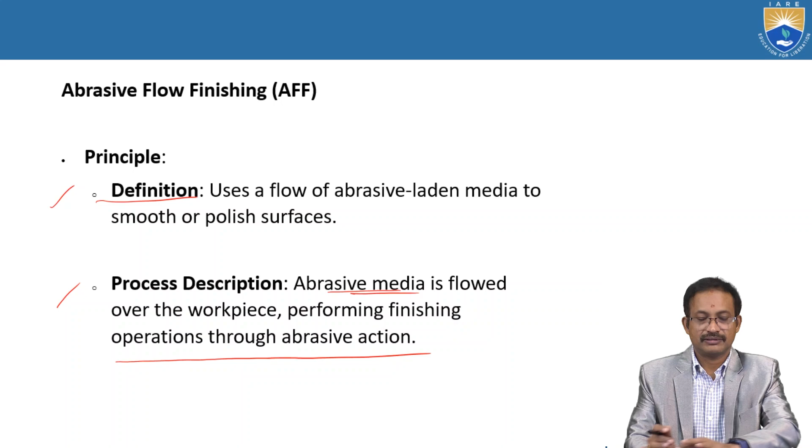At a glance, let us look at the entire presentation. Now, process variables: flow rate, abrasive media. In the machining process, each and every process parameter is very much important. We have to regulate each and every parameter, so then only we will get the expected quality and accuracy. So here flow rate and abrasive media are the process variables.

Flow rate: speed at which abrasive media flows over the workpiece. So we cannot expect the material removal rate with unknown or unpredicted abrasive media flow. We have to control the flow rate as per our requirement. Flow rate is the speed at which abrasive media flows over the workpiece.

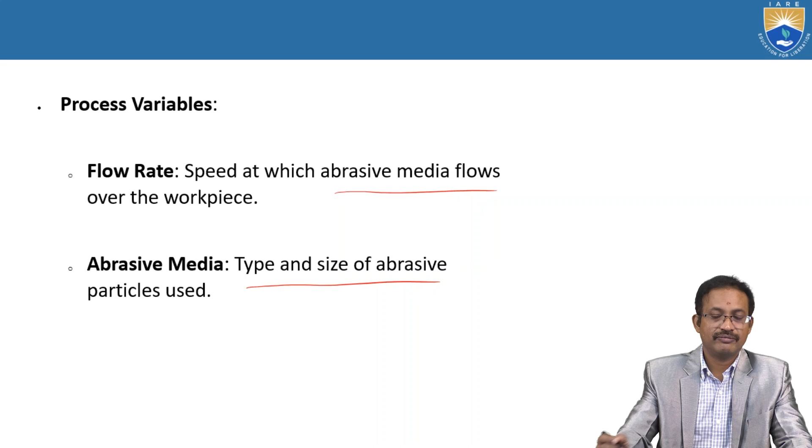Next, second one, abrasive media: type and size of abrasive particles used. What type of abrasive particles are we using? There are so many abrasive particles like Al2O3, SiO2, SiC, like that. So we have to choose appropriate abrasive particles as per our requirement.

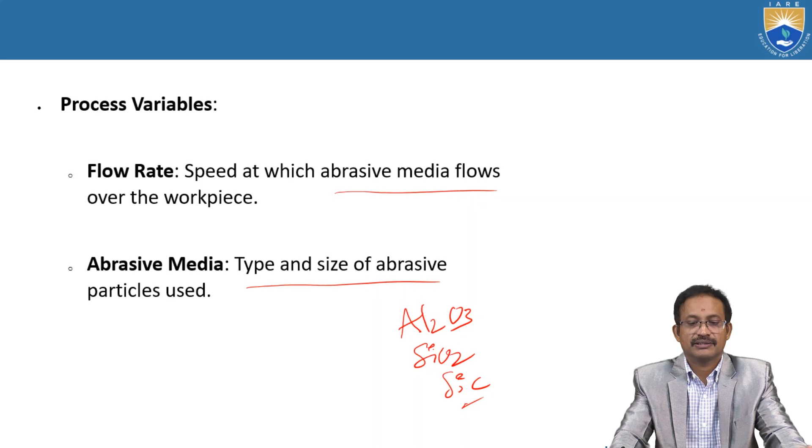Applications: suitable for polishing and deburring complex geometries and internal passages. Polishing means to get a mirror finish surface. Deburring: while we are machining, some debris may remain on the workpiece, or some particles tend to come out but do not come out completely. Removing those is deburring. So it is suitable for polishing and deburring complex geometries and internal passages.

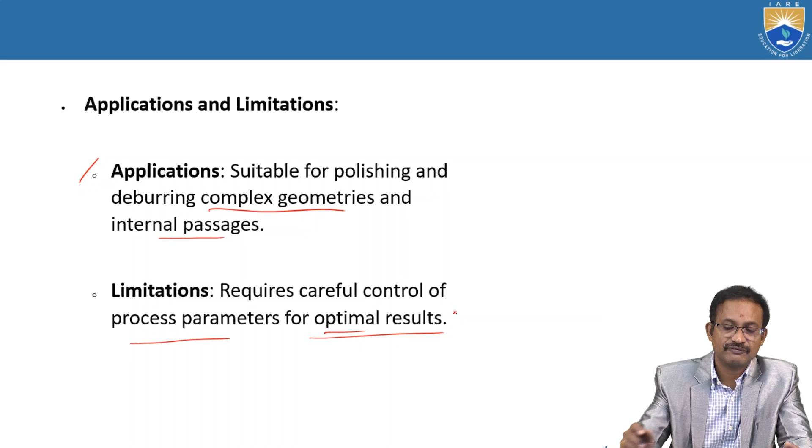Limitations: requires careful control of process parameters for optimal results. Optimization is also important, and at the same time we have to get optimal results. For that, some machining processes may not be suitable. That is a limitation of the manufacturing scenario. So it requires careful control of process parameters for optimal results.

Key terminologies: abrasive media, flow rate. Abrasive media: particles suspended in a liquid or gel used for finishing. Flow rate: speed at which the media flows over the workpiece surface. So what does it mean? Flow rate is the speed at which the media flows over the workpiece surface.

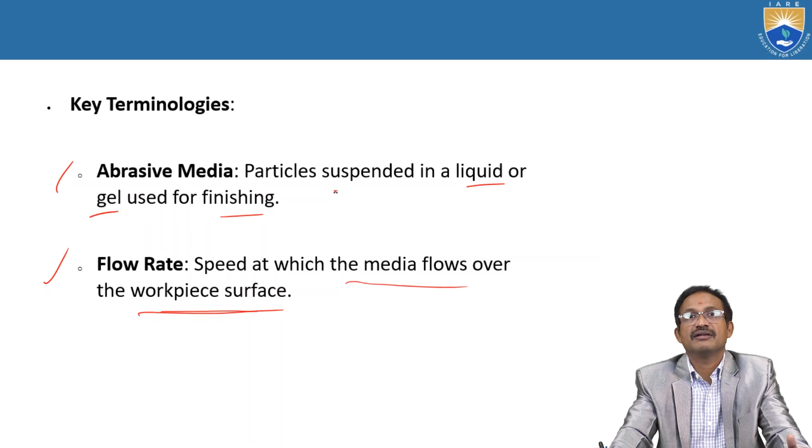Let us discuss abrasive media once: particles suspended in a liquid or gel used for finishing. So these abrasive particles will be suspended in liquid or gel, used for finishing.

Electro stream drilling principle. Here definition and process description are the two items to discuss. Uses an electric field to direct an abrasive slurry for drilling holes in materials. So in order to make holes through drilling, an electric field is set up with an abrasive slurry. The system is electrical, electro stream drilling, and this electric field directs the abrasive slurry for drilling holes in material.

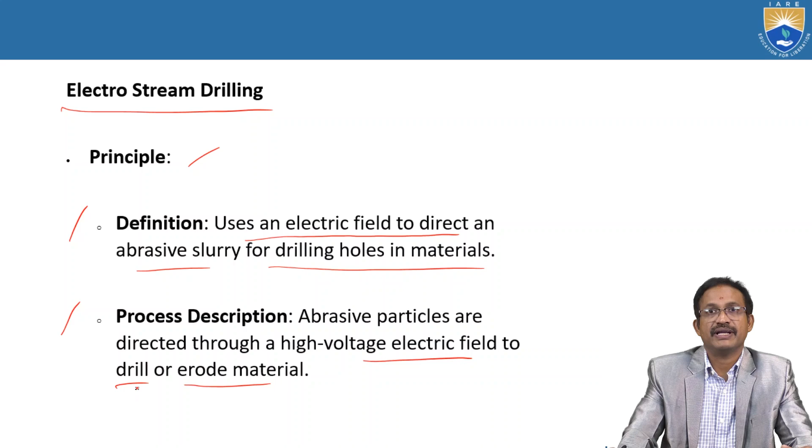Process description: abrasive particles are directed through a high voltage electric field to drill or erode material. Process description: abrasive particles are directed through a high voltage electric field to drill or erode material.

Applications and limitations. Used for drilling precise holes in hard or brittle materials. Let us discuss applications: used for drilling precise holes in hard or brittle materials. Now let us assume a shipbuilding structure. Let us say we need some small holes.

Okay, small holes, and assume that the material is very hard and brittle, where we have to use the technique. So it is used for drilling precise holes in hard and brittle materials. Usually in surgical equipment and in defense equipment, we need to make precise holes, and those materials are usually hard and brittle. Usually the weapons do not have the property of ductility, and the materials should not be soft. So we have to use hard materials.

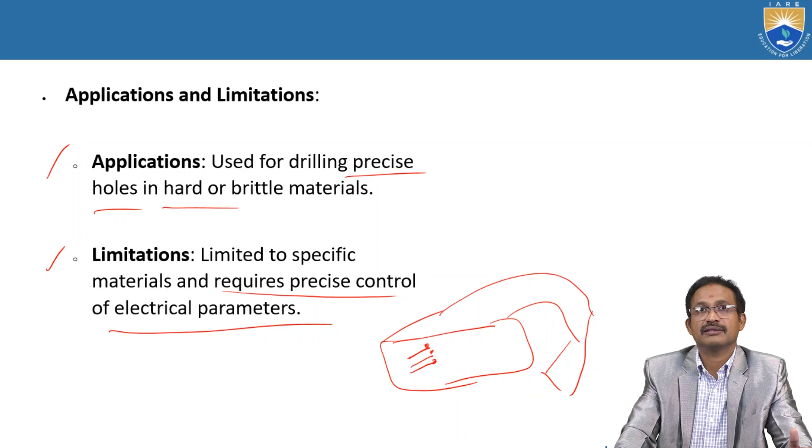Next, limitations. Limited to specific materials and requires precise control of electrical parameters. That's what I'm saying. Here we need to control electrical pulses, and we need to regulate different parameters, like fluid flow rate. All these things are very complex. So if we have a proper mechanism to control all these parameters, heat and flow, and electrical pulses, then only we will get the accuracy. Otherwise we cannot expect it.

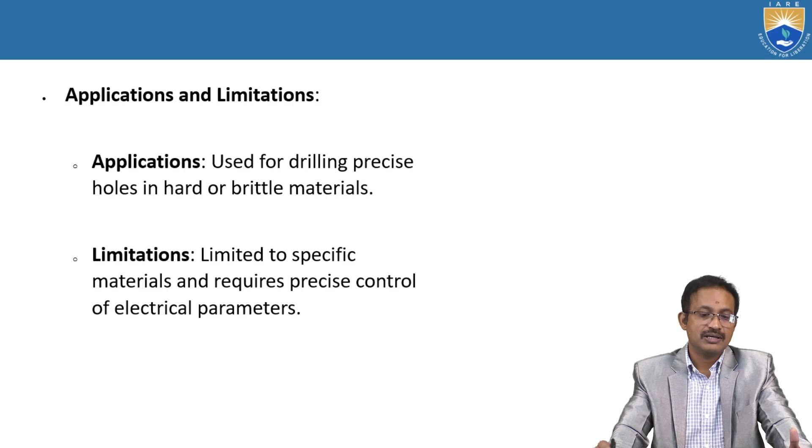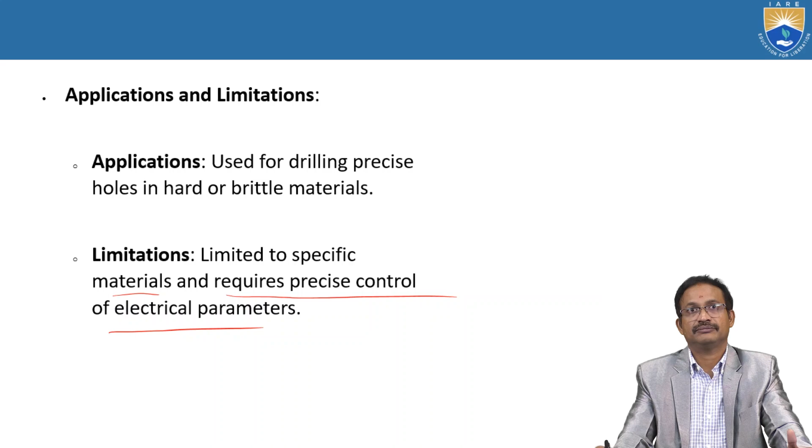So particularly in defense, aerospace, shipbuilding and the medical area, we must have appropriate machining characteristics, like slots, grooves, holes. These features play a predominant role in the functioning of that equipment. The expected features we get only by controlling the process parameters. So one of the limitations is that it is limited to specific materials and requires precise control of electrical parameters. Right. Next, key terminologies.

Electric field: electric force used to guide abrasive particles in the drilling process. Under these key terminologies, one is electric field, the other one is abrasive slurry. The abrasive slurry is almost the same in almost all the processes, so we do not worry about the abrasive slurry in the different machining systems.

Electric field: electric force used to guide abrasive particles in the drilling process. So the electrical field should be strong enough to control all these things. Why? Because it guides the abrasive particles. The abrasive particles are controlled by the electric field. So the electric field is responsible for controlling and guiding the abrasive particles in the drilling process.

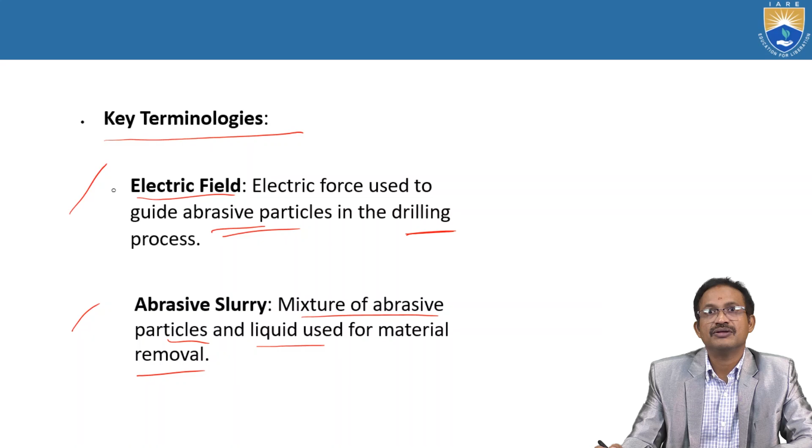Abrasive slurry: mixture of abrasive particles and liquid used for material removal. Right. Electrochemical processes.

Fundamentals of electrochemical machining, ECM. Definition and process description. It uses electrochemical reactions to remove material from a workpiece. Next, process description. Electrolytic dissolution occurs when a workpiece is placed in an electrolyte and an electric current is passed between the workpiece and a tool electrode. So one side is the tool, the other side is the workpiece. Right. Definition: uses electrochemical reactions to remove material from a workpiece.

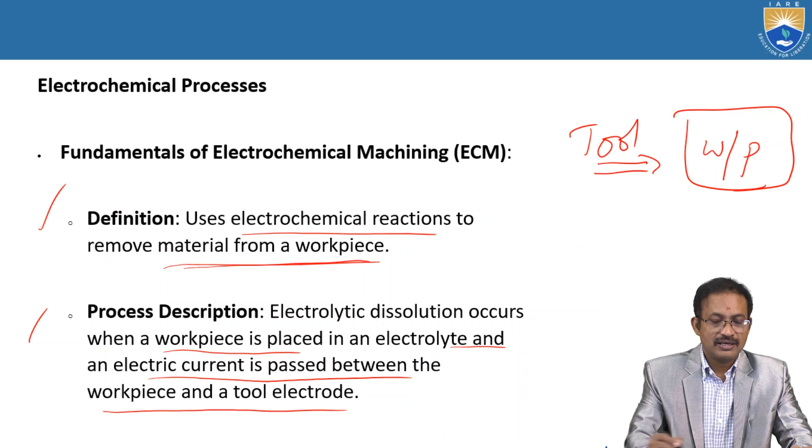Not only electrical, not only chemical, electrochemical reactions. So here chemistry is one and electrical technology is the other one. For the material removal, both electrical and chemical reactions are contributing. Right. Process description: electrolytic dissolution occurs when a workpiece is placed in an electrolyte and an electric current is passed between the workpiece and a tool electrode.

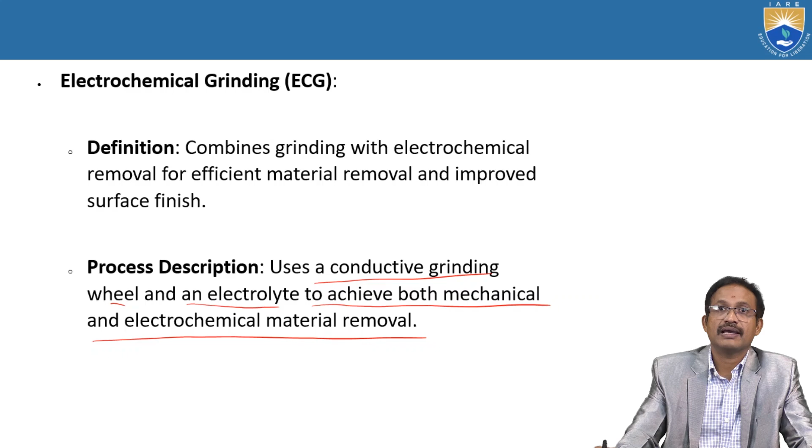Electrochemical grinding combines grinding with electrochemical removal for efficient material removal and improved surface finish. In process description, it uses a conductive grinding wheel and an electrolyte to achieve both mechanical and electrochemical material removal. So in electrochemical grinding, what is happening? Both mechanical and electrochemical material removal contributions exist.

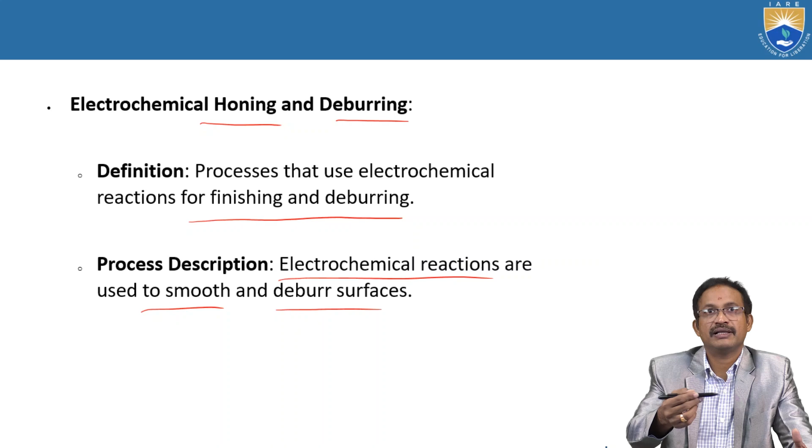Next, electrochemical honing and deburring: processes that use electrochemical reactions for finishing and deburring, like the previous techniques. Process description: electrochemical reactions are used to smooth and deburr surfaces. So here both electrical and chemical reactions perform the finishing and deburring operations.

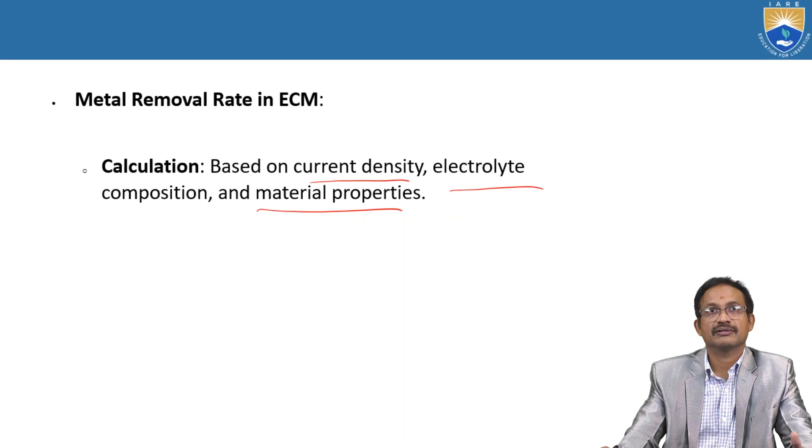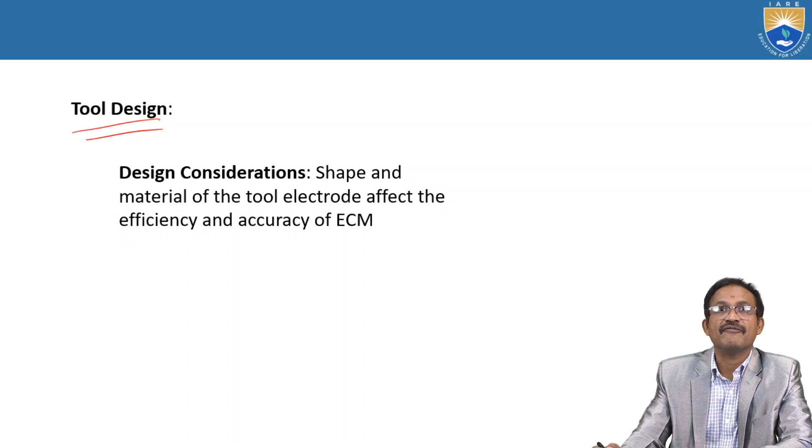Next, metal removal rate in ECM. That is the calculation part, based on current density, electrolyte composition and material properties. Right. Tool design. Design considerations: shape and material of the tool electrode affect the efficiency and accuracy of ECM. So tool design considerations are very important.

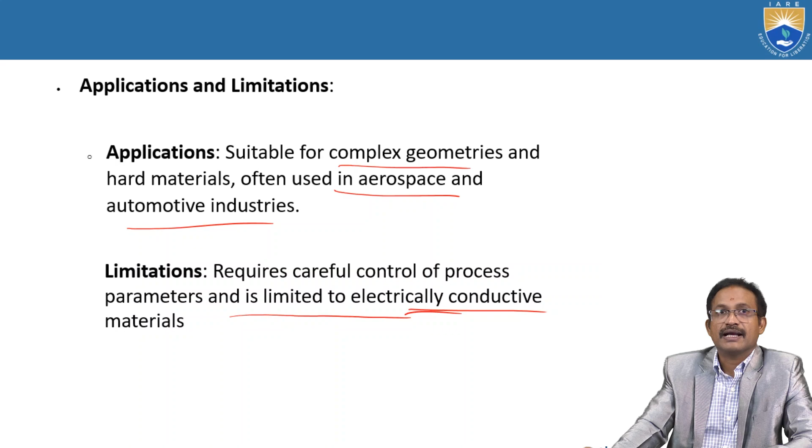Applications and limitations. Applications: suitable for complex geometries and hard materials, often used in aerospace and automotive industries. Limitations: requires careful control of process parameters and is limited to electrically conductive materials. So this technique is limited to electrically conductive materials.